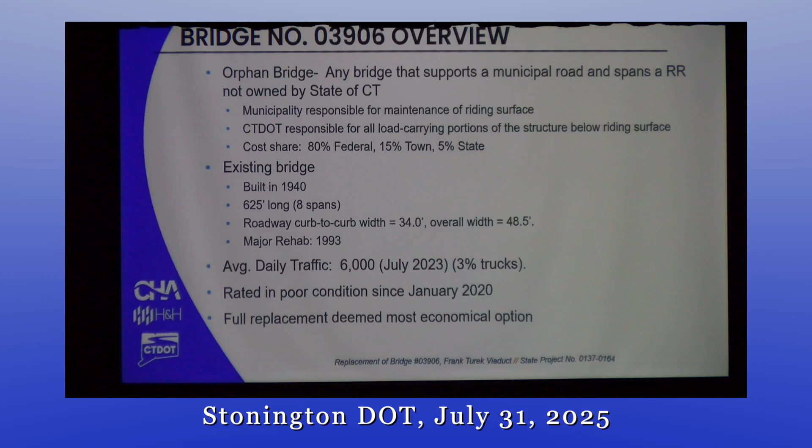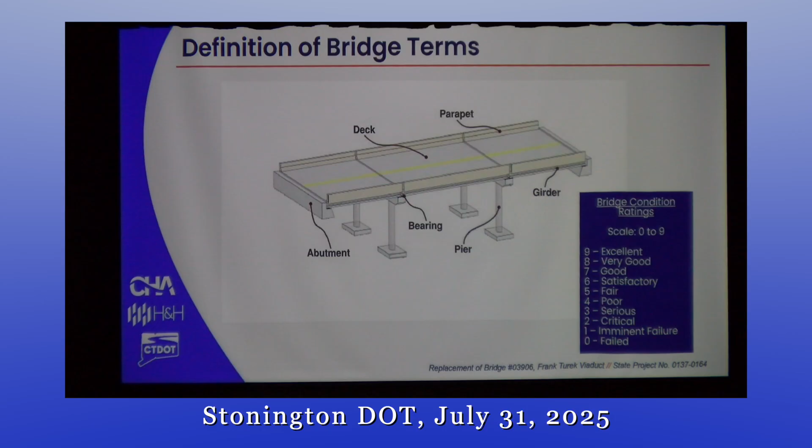I'll cover some bridge terms because I'm going to touch on those briefly. There's a diagram showing some of those major terms. The deck is what you ride on. The parapets are what keep you from driving off the road. The piers are what holds up the superstructure, and that's the part that supports the deck. And then the abutments are at the end. It's rated on a 0 to 9 scale, with 9 being excellent and 0 being completely failed. A 4 is poor, and poor again is still safe, but it needs work.

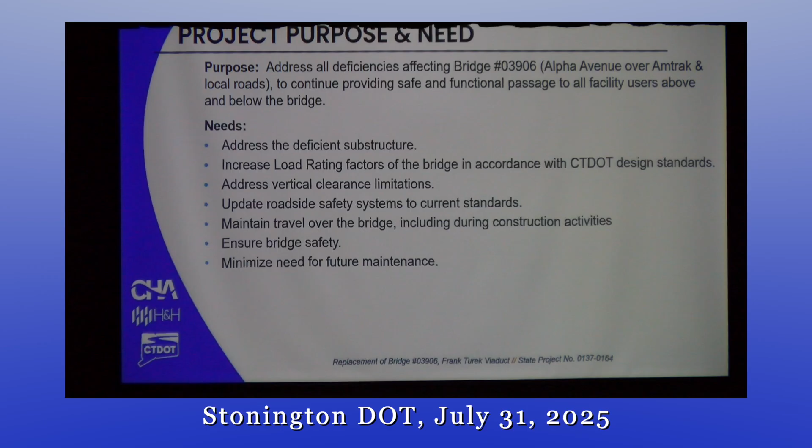The purpose of the project is to address all the deficiencies affecting the bridge, so it will continue to provide safe and functional passage to all the users above and below the bridge. We need to address the deficient substructure, increase the load rating factors, address the vertical clearance limitations, update the roadside safety systems to current standards, and keep travel over the bridge, including during construction. Ensure that the bridge itself is safe for now and the foreseeable future, and minimize the need for future maintenance. After this, we don't want to be back anytime soon.

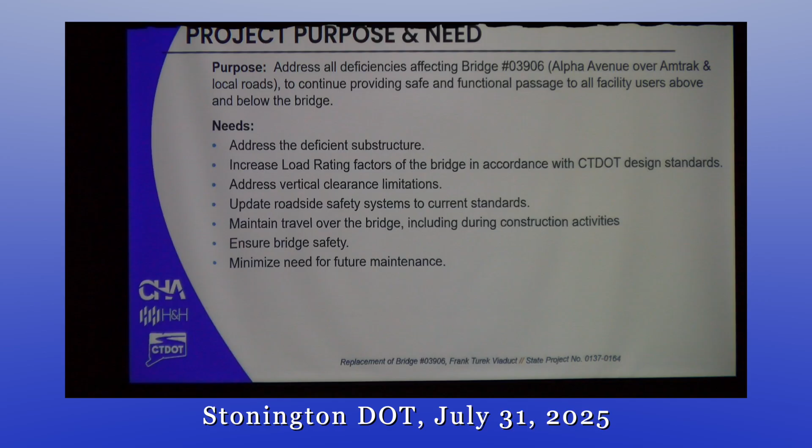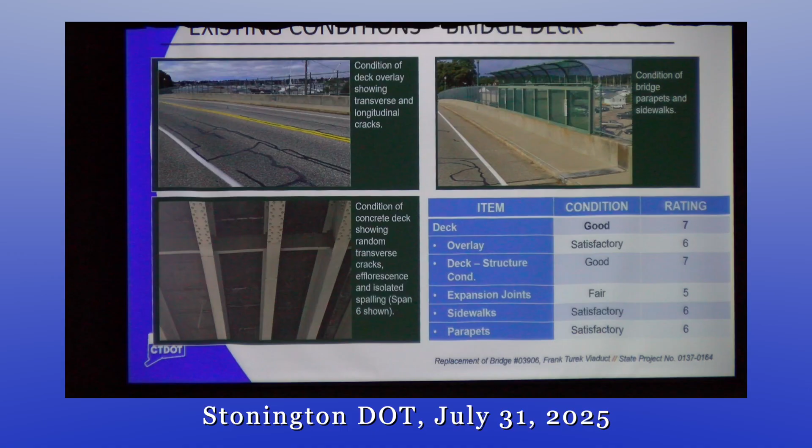The superstructure is in fair condition. That's one step above poor. There is damage to the girders caused by arcing from the Amtrak catenary. There's isolated corrosion damage. There's enough section loss to drop the rating to fair. And in about 10 years, the bridge is likely to become poor. So we want to address the bridge now before it becomes in poor condition.

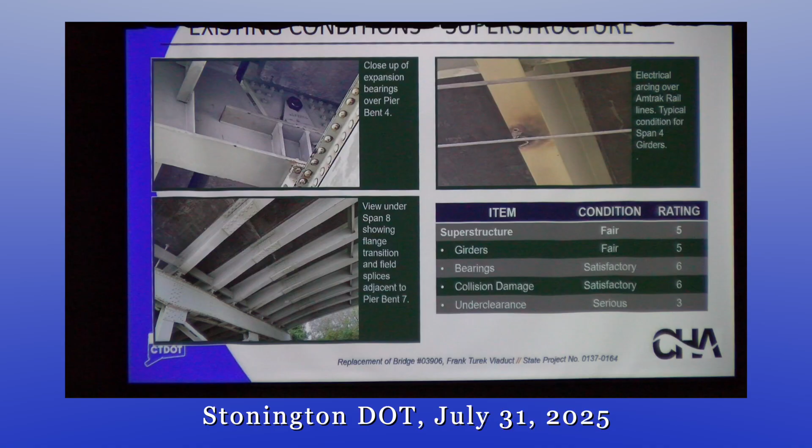The substructure is really what's driving the project. There's a lot of corrosion on the piers, and those are original 1940. The superstructure and deck, I believe, were replaced in the 1993 rehab. But right now, the original components, the piers, are what's failing at this point.

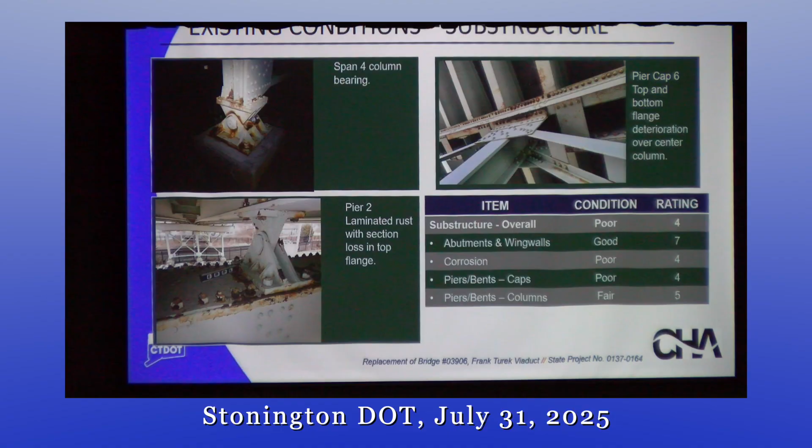It's a little difficult to compare a lot of these options because we spent about 4 years from the start when the bridge was identified as poor condition till now. So I had to adjust some of these numbers for inflation because a lot of the early options we looked at dropped and we added new options later on, so I had to kind of equalize their costs in dollars as of February 2025.

We had an initial rehabilitation study report, and that one, it looked like alternate 4 was going to be the best option. Unfortunately, alternate 4 would require the closure of Main Street and Cutler Street where they cross under the bridge.

The reason why it's so much cheaper than the other options in the long haul is because it would be a much shorter bridge. It'd be only 200 feet long. But when we met with the town, they said the impacts of closing the roads would be unacceptable to the town. So we went back to the drawing board and we came up with alternate 5, which still assumed that we were going to use alternating one-way traffic to handle traffic during construction.

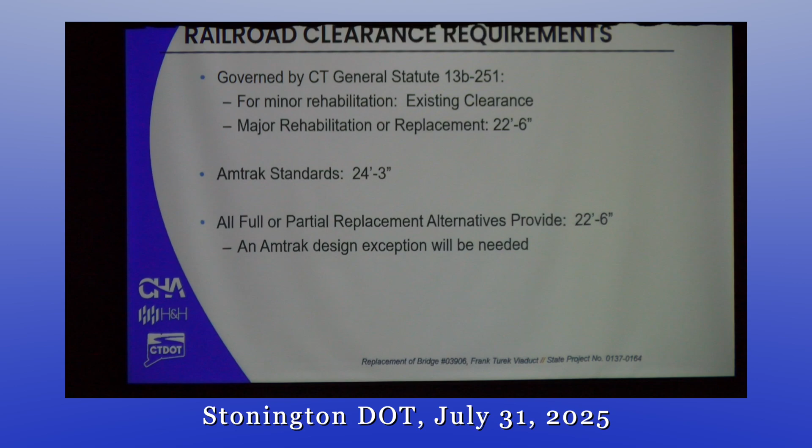Brian? Yeah. Can everybody hear me all right? Okay, I'm going to bend over then, I apologize. I guess I'm holding it.

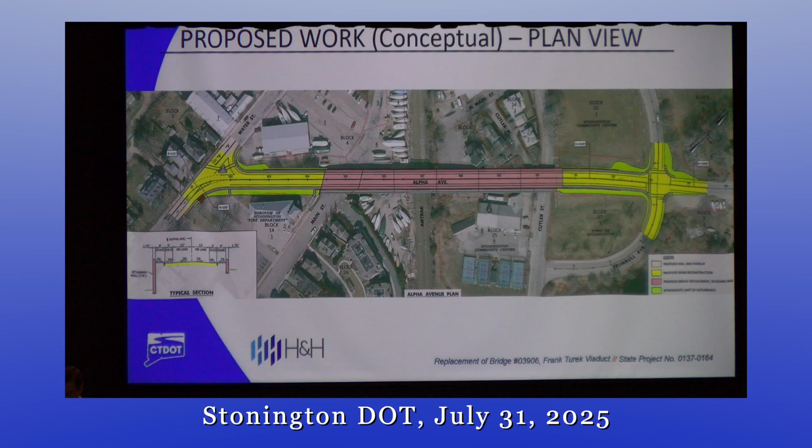This is a cross-section view of the approach roadway, or the roadway that leads up to the bridge structure. It should look familiar. The width of the sidewalks, the width of the shoulders, and the width of the road have not changed, and should not change based on our current plan. The pink in this image is showing retaining walls that we expect to use to support the roadway, and then there will be some regrading on both sides of the structure.

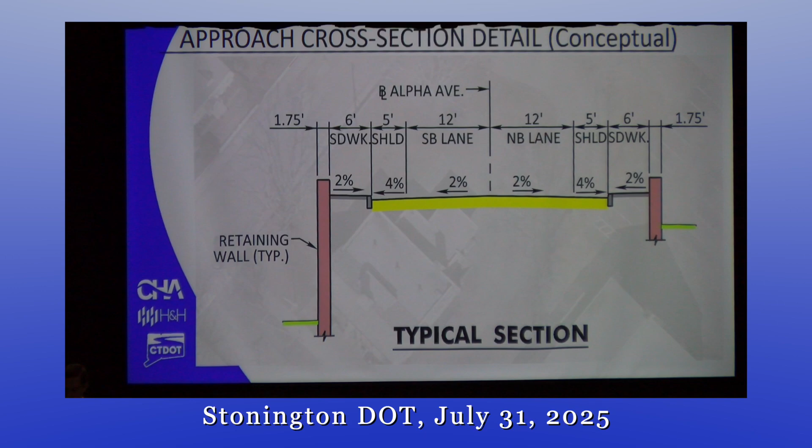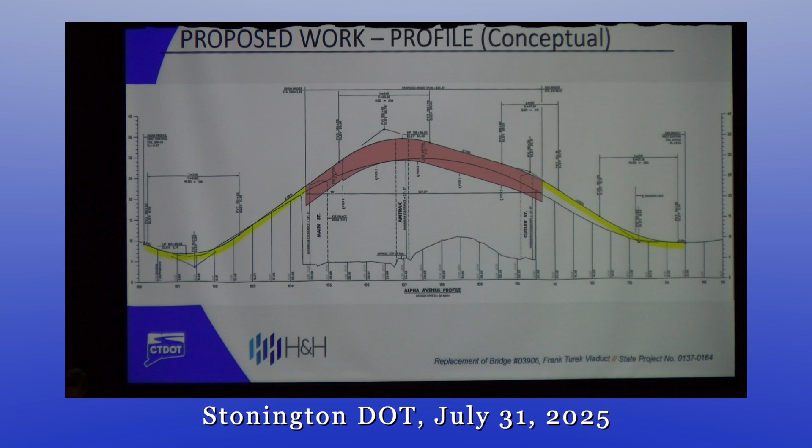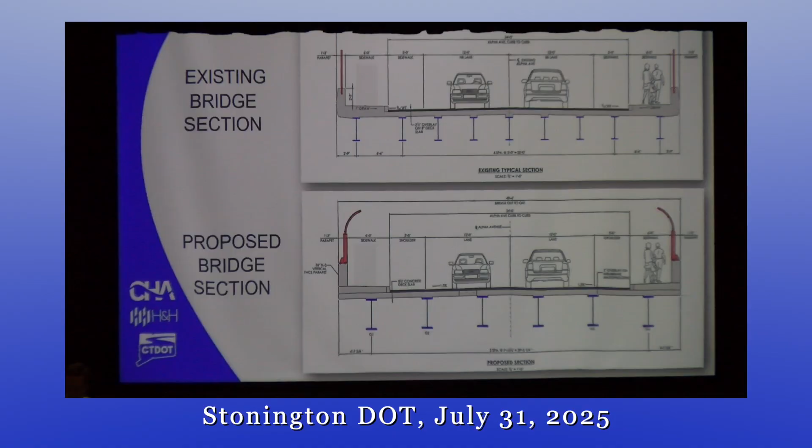Now we're looking at two bridge sections. On the top, we show the existing structure. It's 48.5 feet wide. There are currently 9 girders supporting the roadway and sidewalks. We've got the 6-foot shoulders, 6-foot sidewalks, 5-foot shoulders, 12-foot lanes, and an asphalt overlay, concrete parapets, and a chain link fence. The proposed bridge maintains the same width and cross section. It'll have similar parapets, currently using a 6-girder superstructure.

And as I stated, the footprint of the existing bridge is going to be roughly the same as the proposed. It's just shifted 12 feet to the west. And that's mostly to accommodate the needs of maintaining a lane of traffic in each direction through the duration of construction. 12 feet or 12 days? 12 feet.

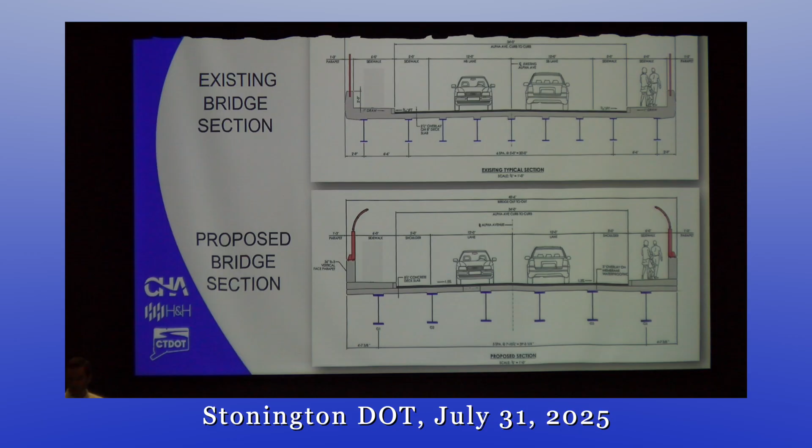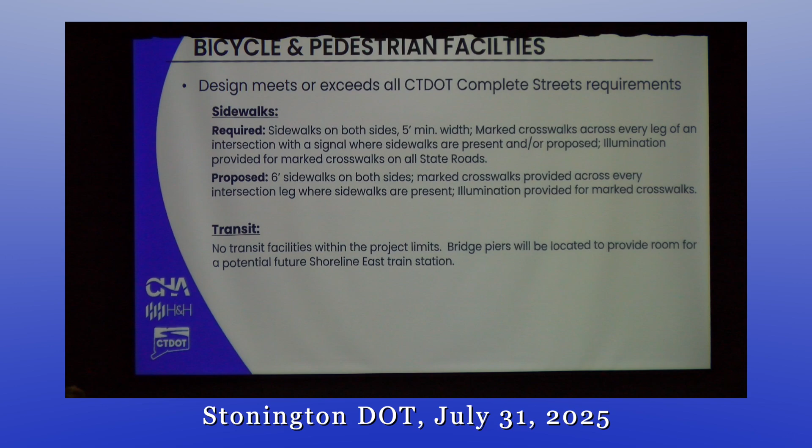To select the bicycle facilities, we had some questions about how the bicycle facilities were chosen. We consider both the traffic volume and the posted speed limit. Alpha Avenue is anticipated to carry 6,400 vehicles per day in the design year, which is 2047. The posted speed limit is 20 to 25 miles per hour. For that combination of volume and speed, because there are no bike lanes in the area, a paved shoulder meets the guidelines.

For bicycle and pedestrian access during construction, the stage construction that we're considering would require closing the sidewalks to use the sidewalks as travel lanes so we can shift the traffic over. So two options are under consideration to handle pedestrians while those sidewalks are closed. One is a detour to Elm Street, which would require the addition of ADA compliant ramps to the Elm Street pedestrian bridge, and also filling in a short section of sidewalk along Cutler that's currently missing.

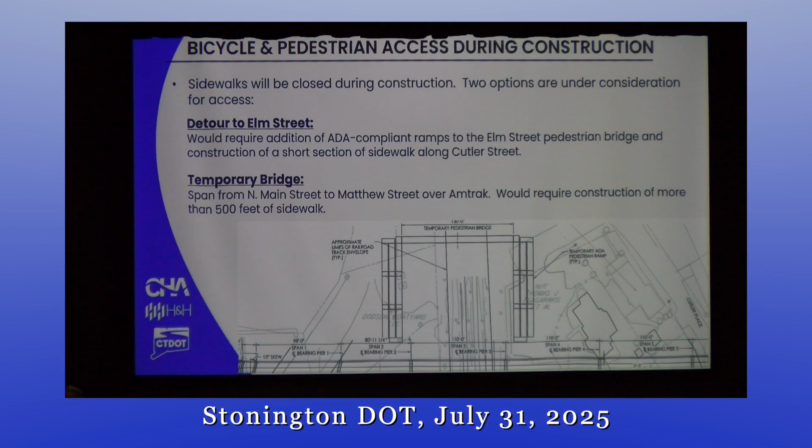The other option is a temporary bridge which would span from North Main Street to Matthew Street over Amtrak. That would require construction of more than 500 feet of sidewalk. Because there's an accessible route now, meaning a hard surface route, we need to provide a hard surface route that is equivalent to what's there now.

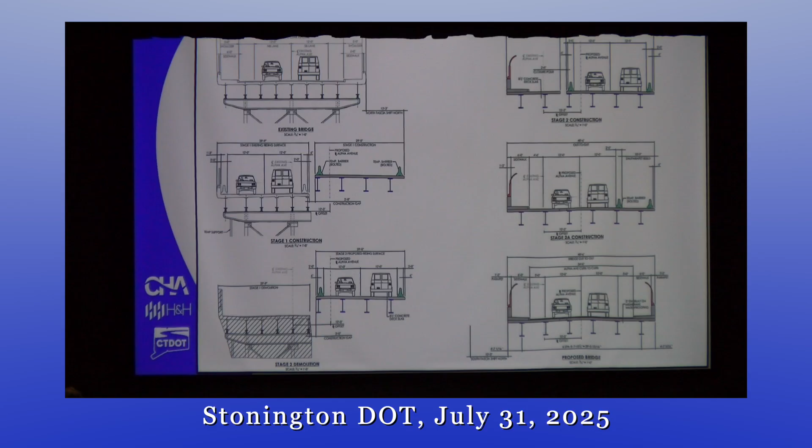Construction staging. The north side is sometimes also referred to as the west side because we call the project as running north to south, but it's really at an angle. Initially, we would start construction by shifting traffic over to the east side of the bridge, demolishing the west third of the bridge, and building a new bridge alongside there. Then we shift traffic over to the new section, demolish the remaining portion of the bridge, and put traffic back on that structure.

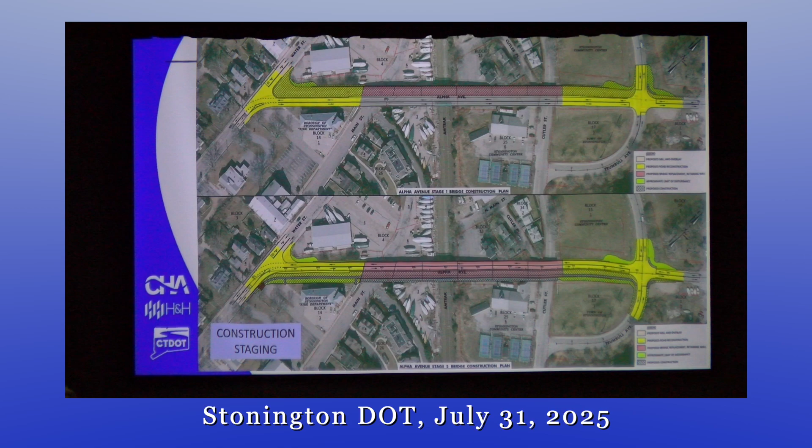There are several considerations, as I mentioned earlier. The initial designs were based on alternating one-way traffic during construction. We also looked into reopening the Water Street grade crossing, but that was requested and denied by Amtrak.

Local emergency officials expressed concern with the traffic backups that we would have during alternating one-way, which led to taking traffic counts in July of 2023 and then some modeling based on those counts. Alternating one-way traffic would simplify the project. We wouldn't need temporary pedestrian accommodations, and it would reduce some rights-of-way impacts because the final bridge would end up pretty close to where it is now instead of shifted over 12 feet, but it would have very severe traffic

impacts. With alternating one-way traffic, all movements at both intersections, that's Trumbull Street and Water Street, would have level of service F. Now, level of service is like grades on your report card. They go from A through F, and F is failed. That's all turning movements, going straight, turning right, whatever. Level of service F. Delays up to 5 minutes, traffic backups up to 1,600 feet. And the person who modeled this warned us that when the backups get like this, the model gets a little hard to predict because then they start backing up traffic at adjacent intersections and everything ends up in gridlock.

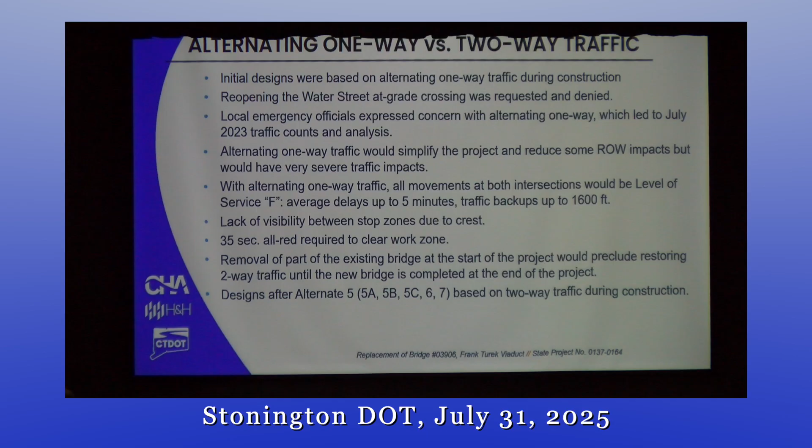Right-of-way needs. The property for the original bridge project was purchased by the New York, New Haven, and Hartford Railroad. This bridge was actually built as part of a grade crossing elimination program. Apparently it was a joint venture; it was federally funded, Connecticut DOT administered the project, but the railroad actually bought all the rights of way. And after the project was over, they retained it. Once the original construction project was complete, when the bridge was built in 1940, the bridge was turned back over to the railroad to maintain. Subsequently, the railroad went bankrupt, which is how it became an orphan.

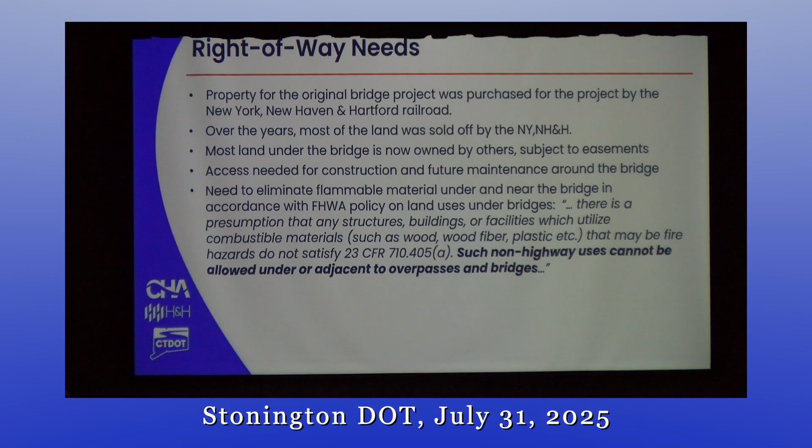Access is needed for construction and future maintenance under and around the bridge, and there's a need to eliminate flammable material under and near the bridge in accordance with FHWA policy, which you have to follow if you're using federal dollars on a project. And the FHWA policy assumes that buildings or anything flammable under the bridge is incompatible with highway use and should be removed from the rights of way. Right, now I'll introduce Kathleen Erickson to talk about rights of way.

Thank you, Stan. So again, my name is Kathleen Erickson, and I'm a project coordinator with the Department's Division of Rights of Way. Our office is responsible for acquiring property rights that are needed for transportation projects all throughout the state. So I'll be giving you a brief overview of what the acquisition process looks like. Before I get further into that, though, I just want to start off by going over the definitions of some common right-of-way terms. So first we have easements, and these allow the department to use property for a specified purpose, but the property owner will still own the land.

A common example of this is a slope easement, where the department would use property to build a slope to support the roadway. Next, we have temporary construction easements, which allow the department to use property temporarily for construction activities, but then these are released upon the completion of the project. And finally, here we have permanent acquisitions, which is when the department will purchase property, either in part or in total, and own it outright. When you're looking at construction plans or property maps, these areas are typically labeled as taking areas.

I do want to mention again too that the property impacts for this project are still being finalized, so they could change as the design progresses. Also, any property rights that are acquired are done so in accordance with Connecticut General Statutes, sections 13A-73 and 13A-98E, as well as the Uniform Act.

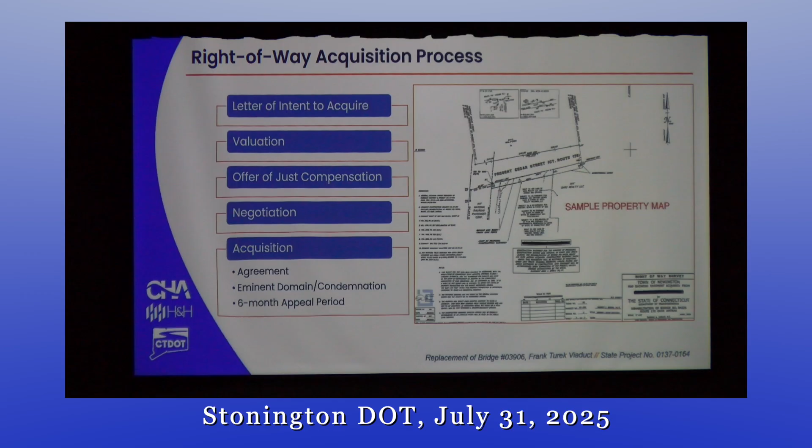Now, as you'll see with this project, the design may require the relocation of businesses or nonprofits, so I just want to quickly touch on the relocation benefits that are available. Each displacee is entitled to advisory services, as well as reimbursement for moving and related expenses. Also, businesses and nonprofits are eligible for reimbursement for some reestablishment expenses as well. A relocation specialist will also be available to meet with displacees during the acquisition process and discuss these benefits in more detail and how they pertain to their particular situation.

And I do again just want to reiterate that the property impacts for this project are still preliminary, and the department will continue to coordinate with property owners and look at different options at potentially decreasing impacts as the design progresses. But if anyone has any questions regarding the right-of-way acquisition process, I'm happy to answer them during the Q&A portion of tonight's meeting. I'm going to turn it back over to Stan to get into the actual impacts. Thank you.

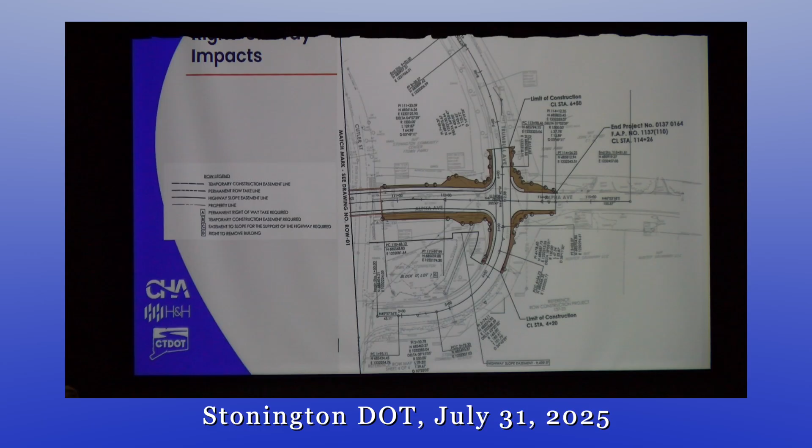Okay, we'll go over the rights-of-way impacts throughout the project. This is the north end of the project near Trumbull Street. Mostly it's just regrading in that area. And then just north of Amtrak, the area shown in red is proposed permanent acquisition, and the green is a proposed temporary easement. The temporary easement is for construction access, but also for safety. Because we anticipate having cranes out there, we'll have to demolish the bridge, so you're going to have chunks of concrete falling, lifting out the old steel girders, moving in new steel girders. There's always a chance that something would be dropped, and we don't want people underneath that in structures or otherwise. So we have a temporary easement, so we have access to that area.

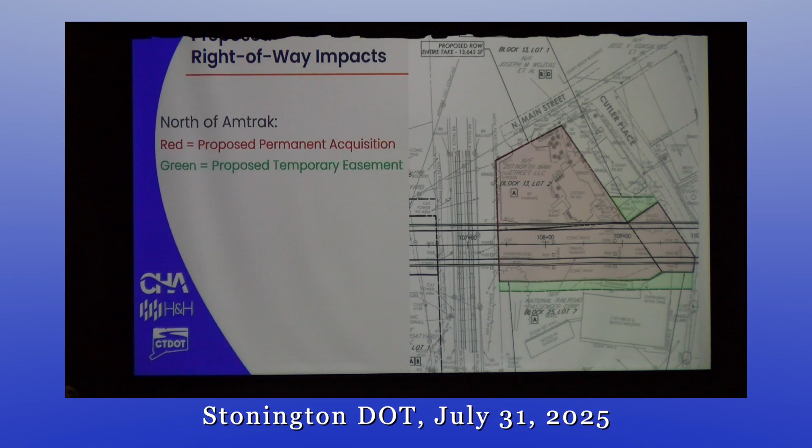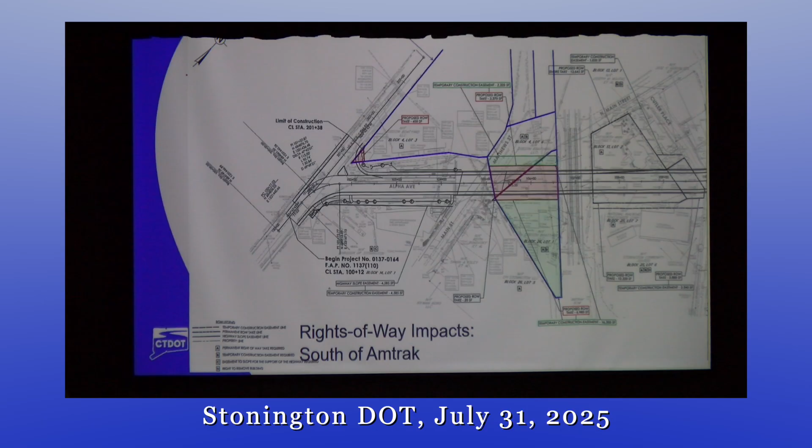South of Amtrak, that's property owned by Dodson's Boatyard. The area in red, which is right underneath the bridge, would be retained by the state to limit storage of material underneath the bridge. The area in green, there's a large portion shown that's on the east side of the bridge, and the reason for a temporary easement there is because the access to that parcel is currently through underneath the bridge, and it will be inaccessible while the project is going on. So we will lease it from the current owner for the duration of the project, and then they'll get it back once the project is over. And DOT can give them a right-of-way underneath the bridge so that they can access that area.

Utility and drainage impacts: relocate overhead power lines. There's some telecommunications cables attached to the bridge now that we will move underground. We typically do that on all of our projects to make maintenance easier. Drainage impacts: the catch basins will need to be relocated. We'll do a drainage analysis to make sure the existing pipes are all up to current standards.

Natural resources: it's located in a FEMA special flood hazard area. It's listed as part of the Stonington Borough Historic District, but the bridge itself is not historic and it's not a contributing element. There are minor temporary impacts to wetlands related to staging expected, but for the most part, we're trying to stay out of the wetlands. The wetlands have already been flagged. It is located within the coastal area, not in an aquifer protection area.

Anticipated permits are all, or mostly, from Connecticut DEEP: inland wetlands, stormwater, Army Corps of Engineers self-verification, and possibly a coastal area management permit if we don't need a DEEP inland wetlands general permit. The anticipated project schedule: we are in the preliminary design phase right now. The design approval, which is when DOT would approve the preliminary design, would be in December of this year. The design completion, when the final design is done, would be in May '27.

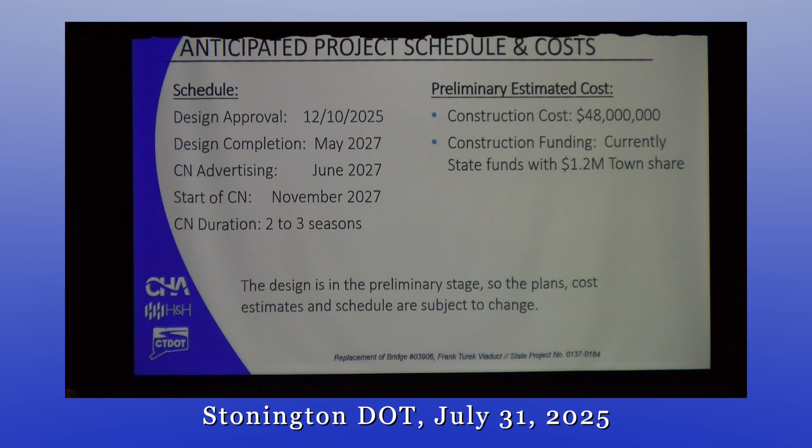The design is in a preliminary stage, so all of this is subject to change. The plans, the cost estimate, the schedule, all is subject to change. You can reach out after the meeting by email, by phone, or on the project webpage. You can also join us for informal discussion, but now we're going to open the floor for comments from the public.

All right, so we are going to have the borough warden, there's legislators too.

One quick comment, there's a car in the parking lot with its lights on, a VW Beetle 1AL VG9, just a reminder. Go up there, you kept your lights on.

All right, so borough warden. Good evening, everyone. Welcome. My name is Michael Sheffers, the Stonington Borough Warden, and I'm here tonight to share remarks on my behalf as well as those of First Selectman Danielle Chesebrough. Danielle regrets that she could not be here this evening.

We understand how deeply personal this project is. When potential impacts to private property are involved, it's natural and right for people to ask hard questions and expect clear answers. As your local leaders, we are committed to working hard to ensure community needs are reflected through this process. We are optimistic that by all of us working together, we can have a project that results in a positive outcome for our community, both now and for future generations.